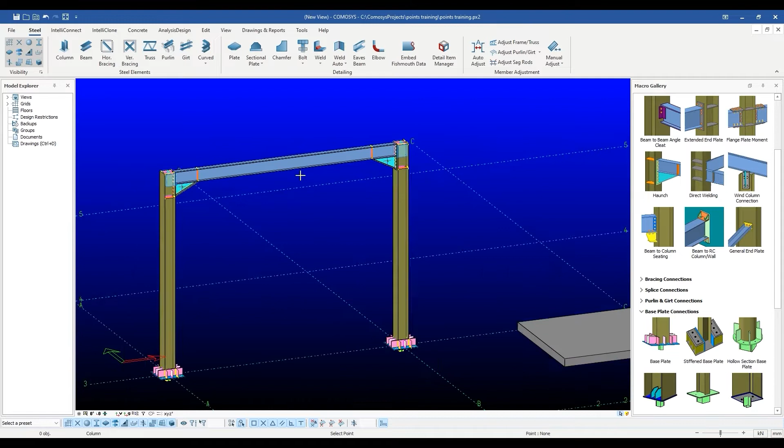Almost everything is entered by selecting points on the screen in COMOSYS. Whether you want to enter beams and columns, plates, bolts, rebars, or create cuts, you will be needing points to which you can snap to. Sometimes these points will be readily available in the form of snappable intersections of grids, or endpoints and midpoints of existing objects, etc. However, more often than not, these readily available points will not be enough to create what you are trying to create.

For such situations, you will need more points. This video is to explain how you can snap to points by either creating them first, or in some cases snapping to calculated points in space without creating them.

The first method, which by far gives the quickest results, is the direct entry method. Using this method, you can request COMOSYS to calculate a new point in space by using some existing snappable point. The way you use it is by hovering with the mouse above some existing point, and pressing Enter. A small edit box appears on the screen.

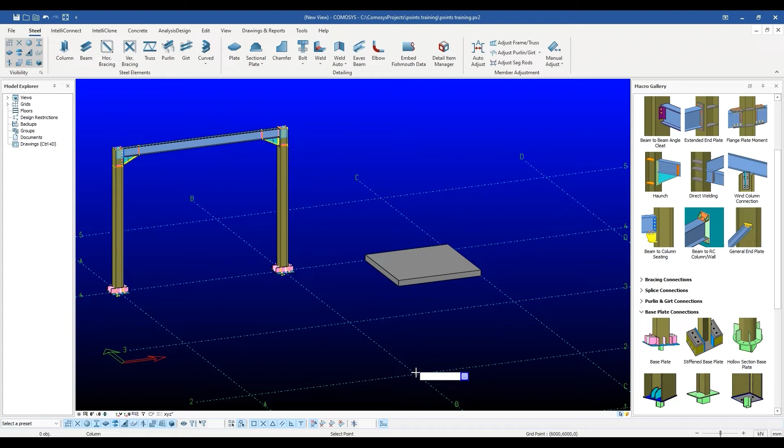You can enter certain shortcut formulas in this edit box to snap to new points. For instance, we can write DZ1000 here, and the command will snap to a point which is 1000 mm in the Z direction of the current work plane from the point over which the mouse is hovering. We could also have written DX1000 to get this result, or DY1500 to get this result.

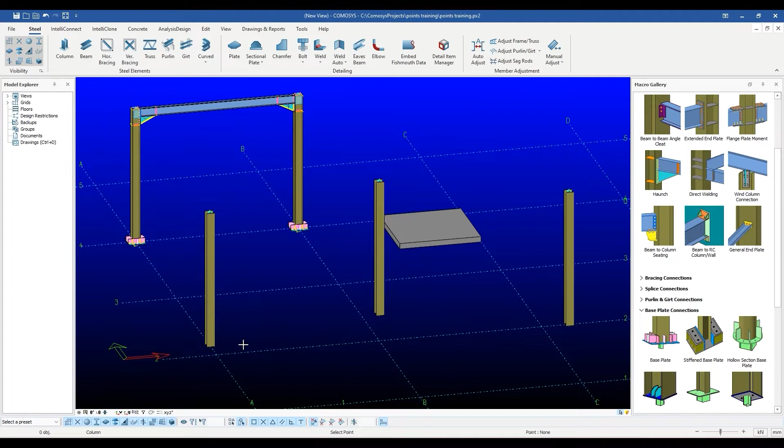It is to be noted that these distances are calculated in the directions of the current workplane. So if the workplane was rotated, they would be calculated differently.

We can make good use of this style of data entry when entering inclined roof beams, for instance. Let me show you an example here. You can see two columns over here, and the height of the column is 5000.

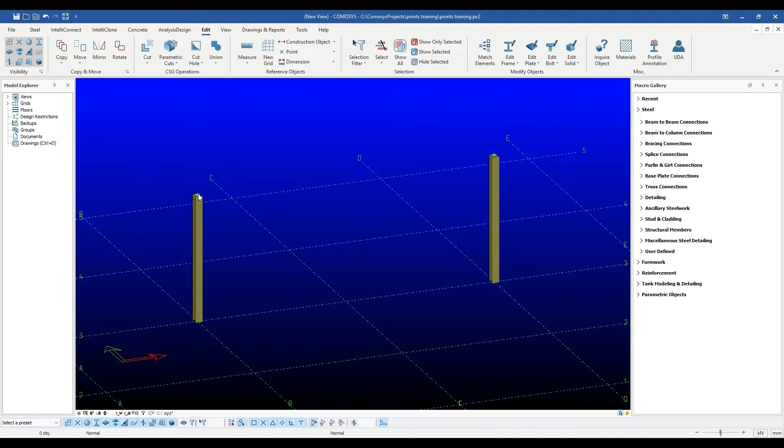We can draw an inclined beam by simply writing DZ6000 while hovering above the midpoint of the portal frame at ground level to snap to the apex point.

Another formula can be like this. We can enter at 6000, 0, 1000 in the edit box. The command will snap to a point which is at a distance of 6000 in the X direction, 0 in the Y direction, and 1000 in the Z direction from the point over which the mouse is hovering.

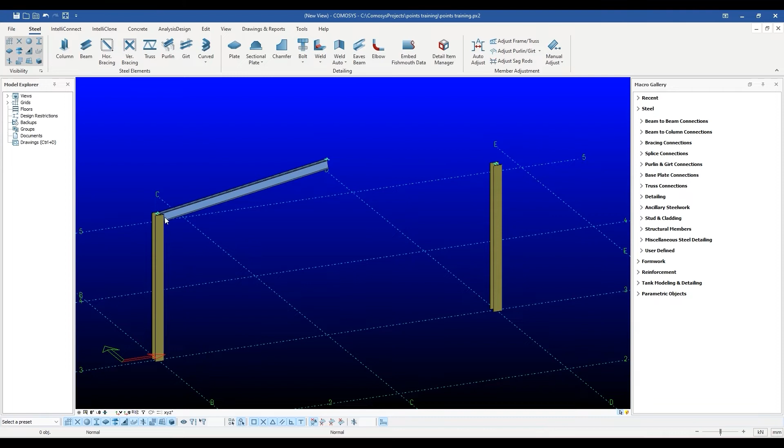Ensure that the mouse doesn't move as you enter these formulas and press Enter. The mouse should still be hovering over the source point at the moment you press Enter. As you can see, we have entered the same roof beam as before, but by hovering over the top of the column this time.

Now we can create another beam over here simply by snapping to the snappable point of this created beam and column, as we already discussed before. When a command requires two or more points, and the first point has been snapped to, the second point can be calculated by using another version of the shortcut formulas.

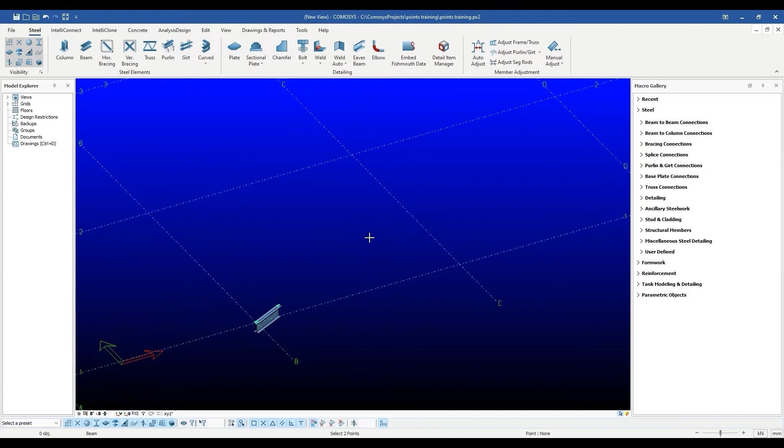You can simply write a number like 1000 and press Enter. In this case, COMOSYS will calculate a new point, which is at a distance of 1000 from the hovered point, in the direction of the vector pointing from point 1 to point 2. You can always enter negative numbers as well.

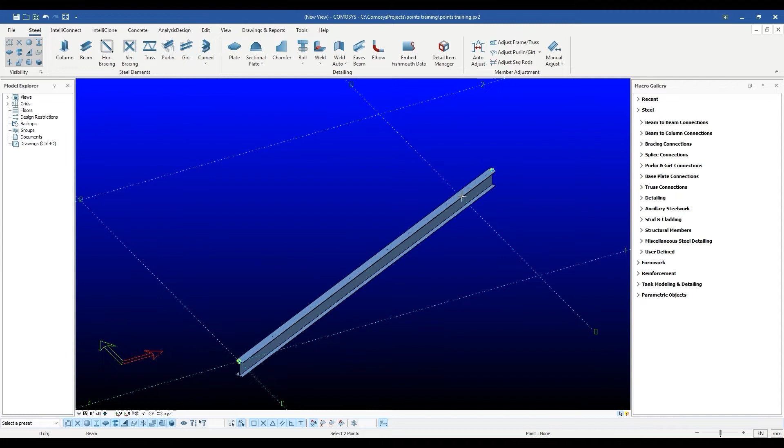Similarly, preceding the number with the number sign will calculate the new point by offsetting it from point 2 rather than point 1. This form of point entry is very fast, and we recommend you use it extensively, and only revert to actually creating new points where this option fails.

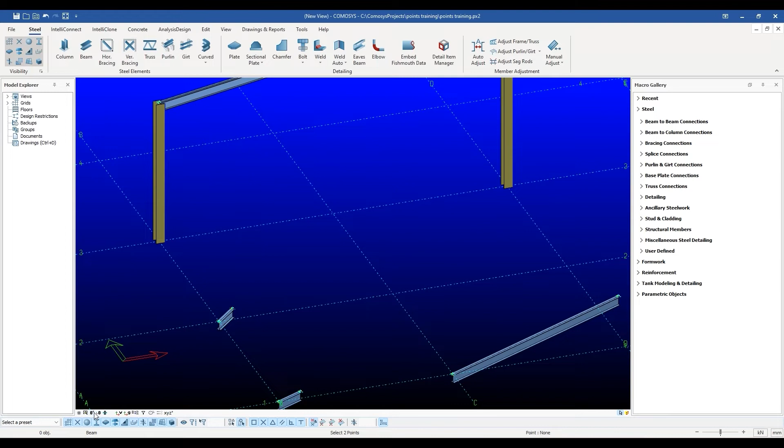There is another shortcut formula which can be used in this method, called the angle distance formula. After pressing Enter to get the little edit box, we can write something like A 45, 1000. This will offset the hovered point by a distance of 1000, in a direction of 45 degrees from the current workplane x-axis.

We recommend you use these direct entry methods to get used to them. Once you do, they become very intuitive and time-saving. But there will be situations when these direct entry methods fail. In those situations you will need to actually create physical points in the model in order to be able to snap to them.

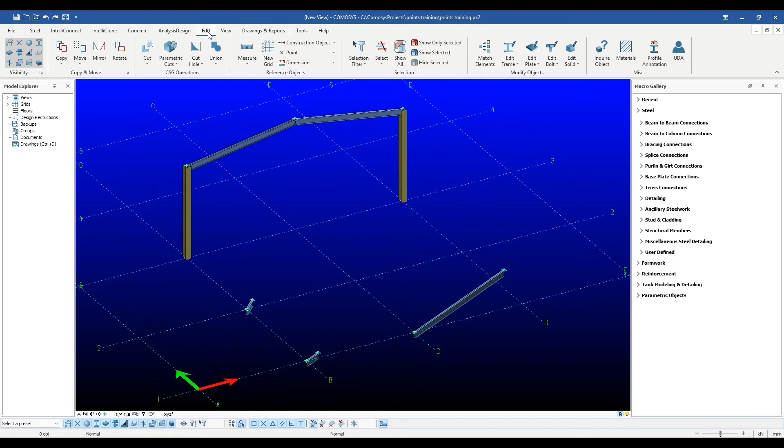These commands are provided under the Edit menu in COMOSYS over here. Now let's show how each of these commands work one by one.

The first command point is created by selecting this command, and click. You can see the point created here.

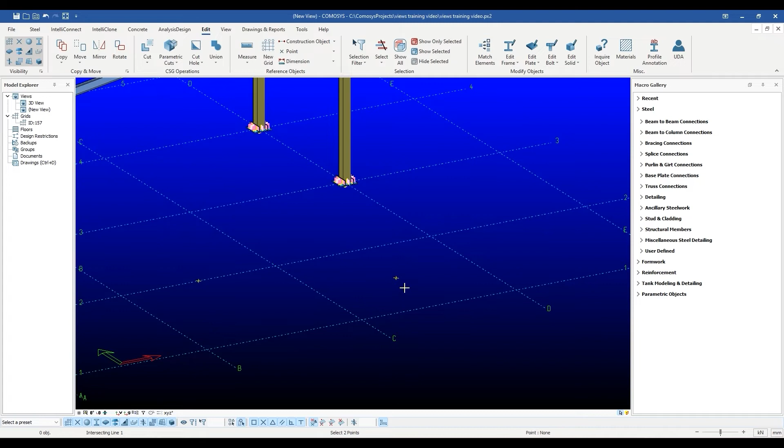The next command for point creation is the intersection points command. This is a very useful command, which creates a point at the intersection of two lines. The user simply selects 4 points and a fifth one is created on the screen. The first 2 points selected represent line segment 1, and the last 2 points represent line segment 2. The new point created is basically the intersection of these 2 line segments.

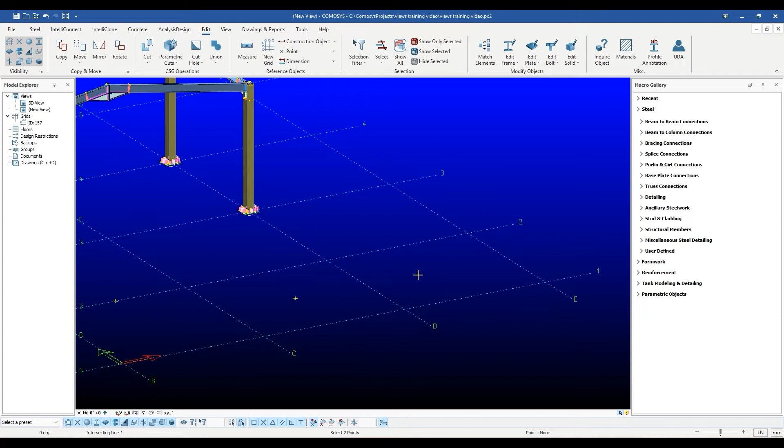If the lines chosen are parallel to each other, no point is created. The intersection point created may lie outside the line segments, as the line segments are treated as infinite lines by COMOSYS.

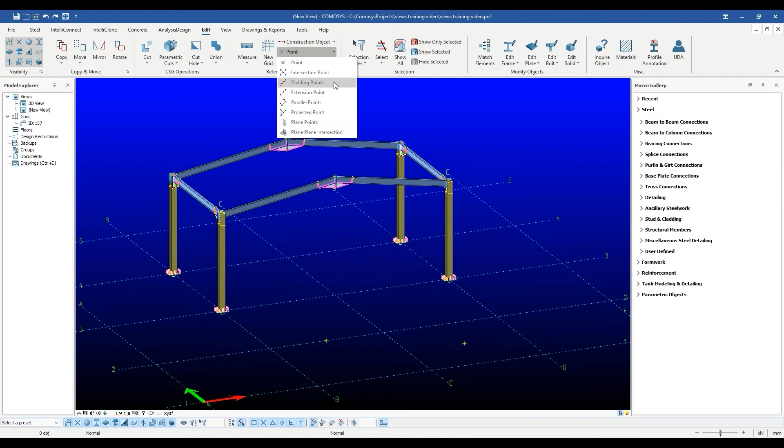The next point creation command available is the dividing points command. This command asks the user to select 2 points, and then divides the chosen line segment into n equal intervals. As always, the setting with which this command works, namely n, can be changed by pressing Shift and clicking the button. Once this setting is set, the command can be used to divide any chosen line segment into equidistant points.

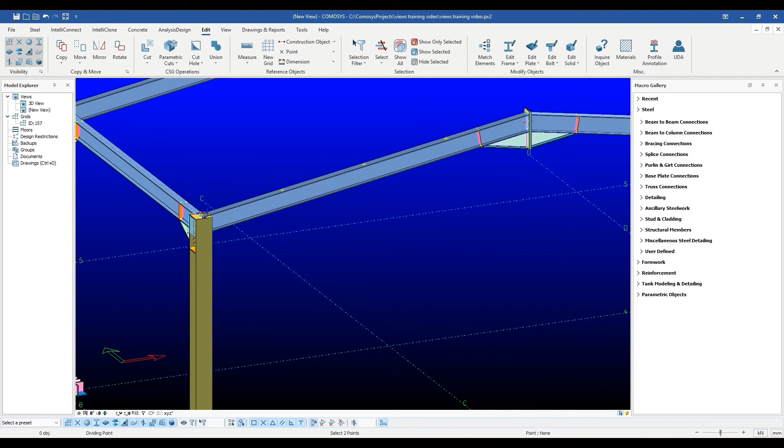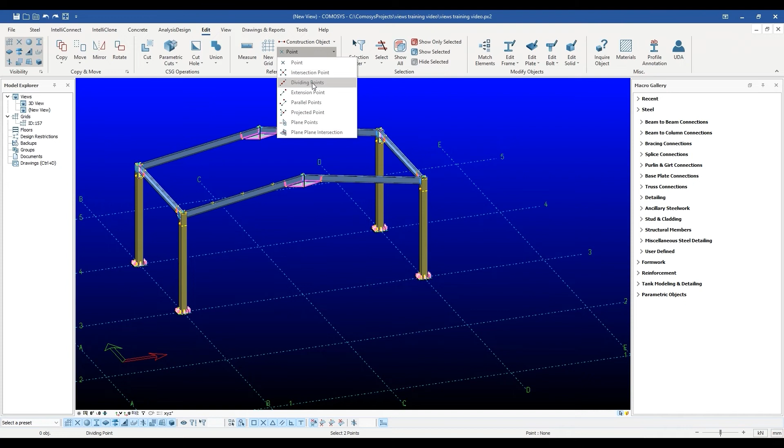A neat trick regarding this command is to press and keep pressed any number from 1 to 9 on the keyboard, just before selecting the second point of the line segment. This will temporarily override the setting n of the command, and saves a lot of time for the user. So pressing 5 and keeping it pressed just before selecting the second point, for instance, will divide the line segment with 5 points, even if the internal setting is different from 5.

Now we can divide this roof beam into 6 equal points by pressing 6 while doing so. It will put 6 points in between the chosen points of this roof beam.

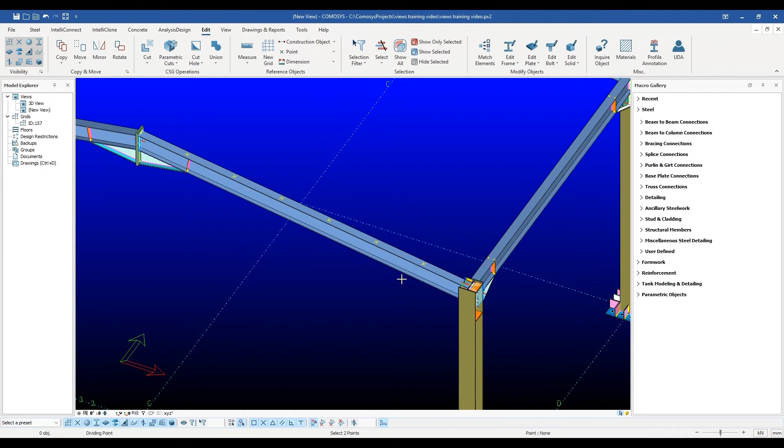The next point creation command available is extension point. This too has a setting D, which can be modified by pressing Shift and left-clicking the button. When you use the command, the program prompts the user to select 2 points P1 and P2. It then creates a third point at a distance D from P2, in the direction from P1 to P2. It should be noted that setting D can be a negative number as well.

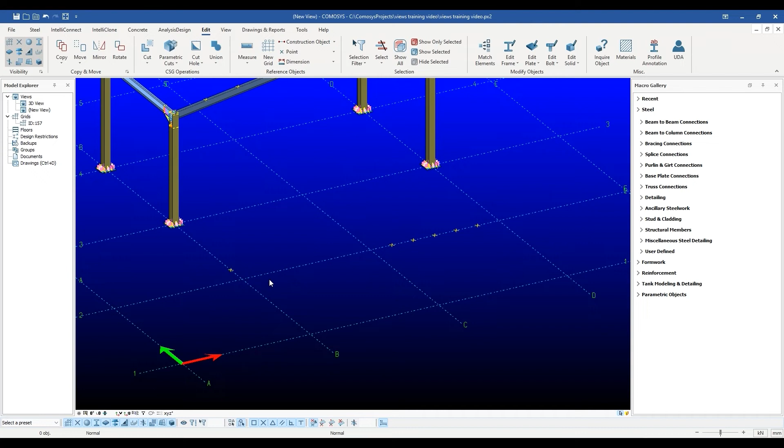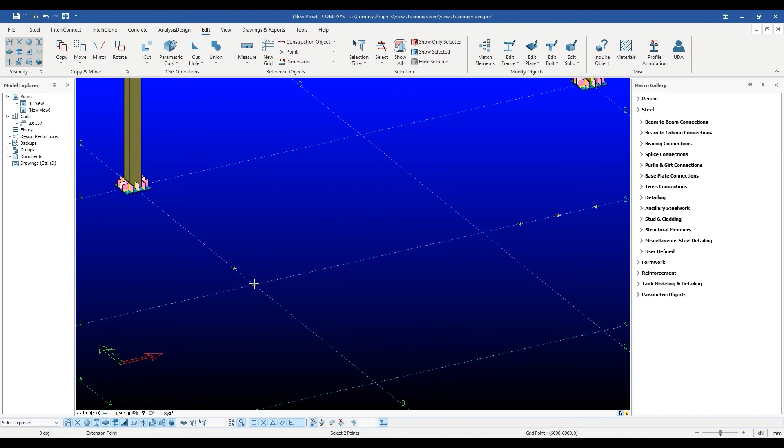So for instance, if the user wanted to create a point 25 mm before this point along this line, he would press Shift and click on the command, enter -25 as the setting, and then select any point on this line, and these 2 points create the required point.

The next point command is the parallel points command, which too has a setting D, which can be accessed by pressing the Shift button and clicking the command. This command creates 2 points, parallel to the chosen 2 points, at a distance D from them. The points are created in the plane of the view in which the user is working, so the 2 points chosen must also be in the same view plane. One thing to note is that the order in which points 1 and 2 are chosen decides whether the parallel points created are to the left of the original points or to their right.

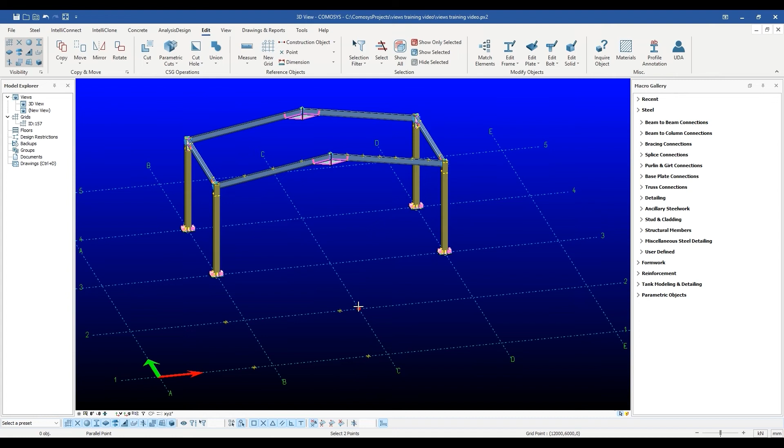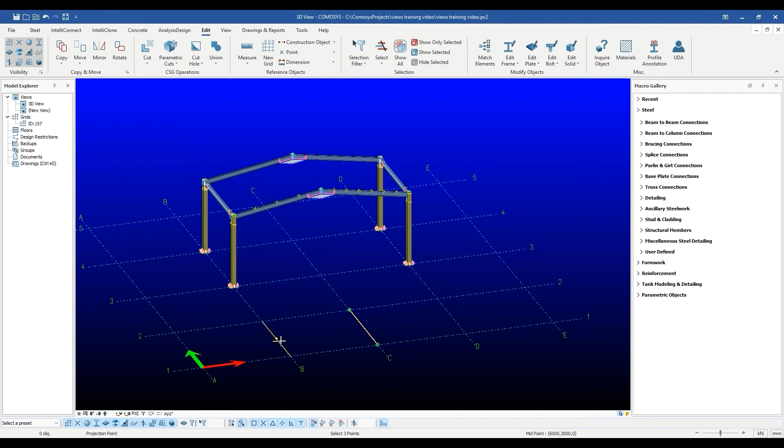The next command is the projection point command. This command does not have a setting. The user is asked to select at least 3 points. The third point, and any points chosen after that, are projected perpendicularly to the line defined by the first 2 points.

One powerful point creation command is the line plane intersection. In 3D geometry, a plane is defined by 3 points, whereas a line is defined by 2 points. The user is asked to select at least 5 points. The first 3 points represent a plane in space, and the last 2 points represent a line in space. If this line intersects the infinite plane, COMOSYS will create a point at that intersection.

It is to be noted that after selecting the 5th point, the user can continue to keep selecting sets of 2 points, each of which will represent other lines. All these lines will also be intersected with the plane, defined by the first 3 points. This command is very useful in complex geometries, and especially in the detailing of steel structures.

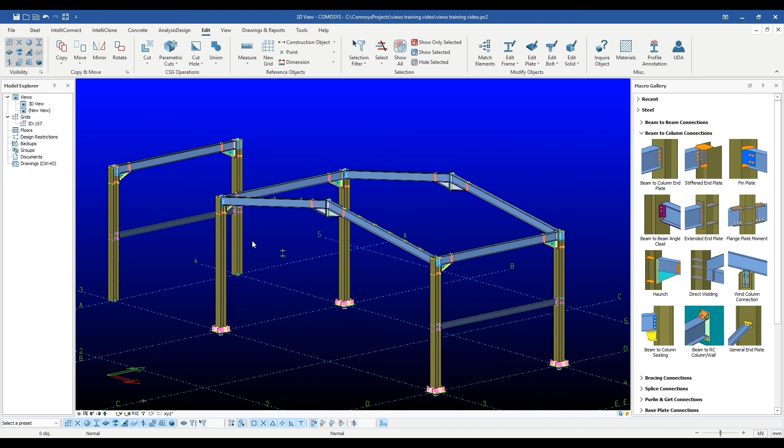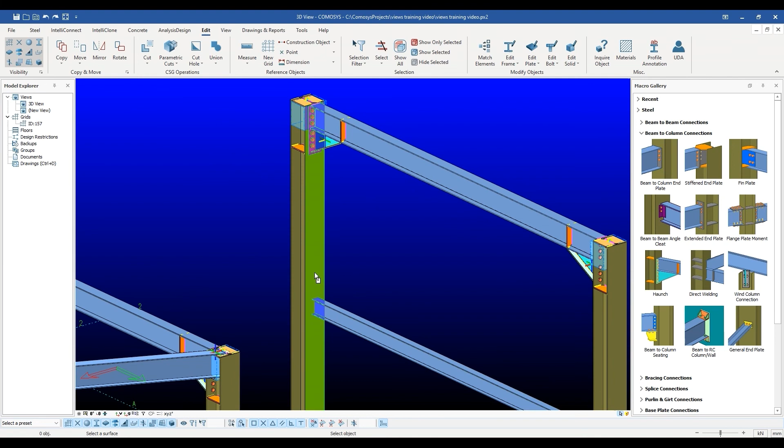The final point creation command allows the user to select 2 surfaces. Each surface represents a plane. COMOSYS creates several points on plane 1, where surface 2 intersects it. Depending on the geometry of the surface, its extension can intersect plane 1 at more than 2 points. You can use these points according to your need. This command too can be very useful in steel detailing of complex geometries. We will use it in appropriate examples in the relevant videos.

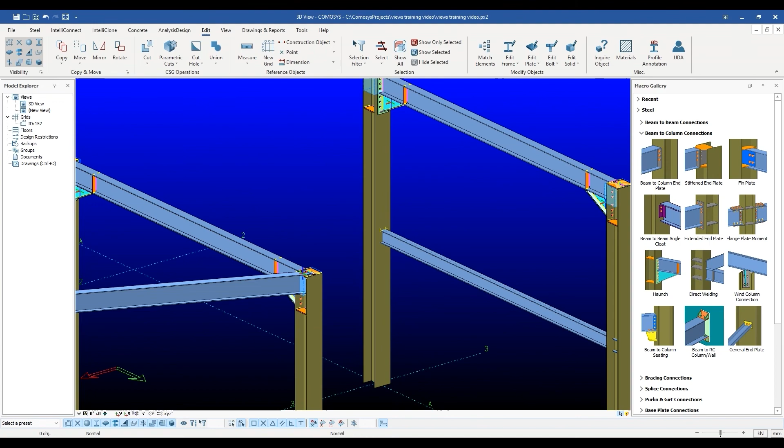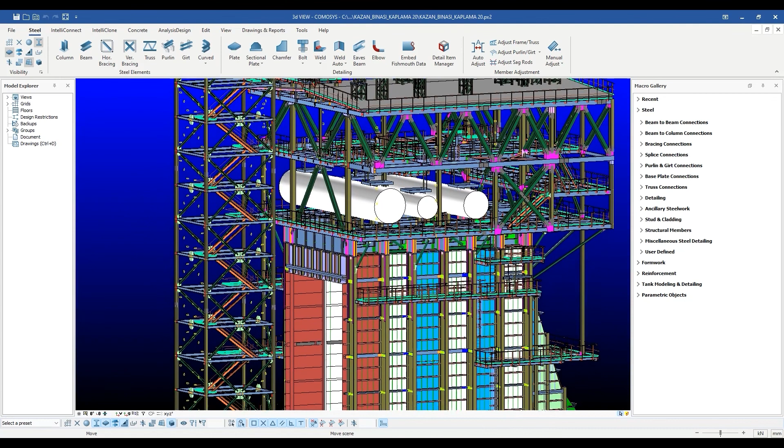As was said earlier, all objects are created by using points. As such, the ability to create points anywhere in 3D space makes COMOSYS extremely powerful. Many template-based programs only allow data entry which fits a certain pattern. With COMOSYS, however, you are not bound by any templates. If you can imagine it in 3D, you can probably create it in 3D.